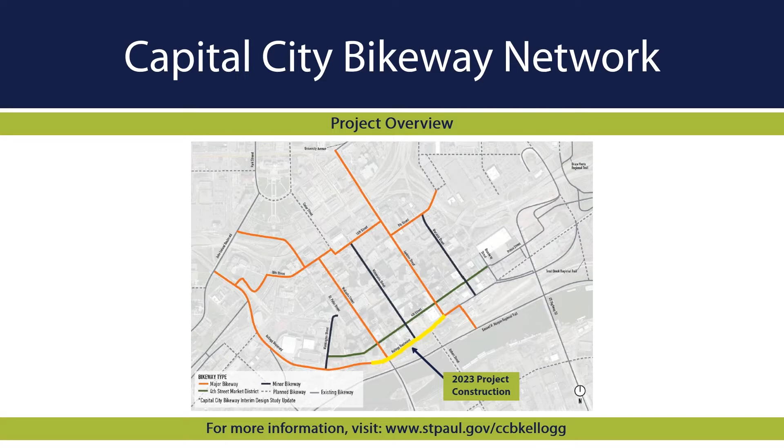Today, Kellogg Boulevard between St. Peter and Jackson does not have dedicated bike facilities, has parking in front of City Hall between St. Peter and Wabasha, has 3 vehicle lanes in each direction, has longer pedestrian crossings at the intersections, and existing vegetation in the center medians limits visibility, and has minimal stormwater treatment along the corridor.

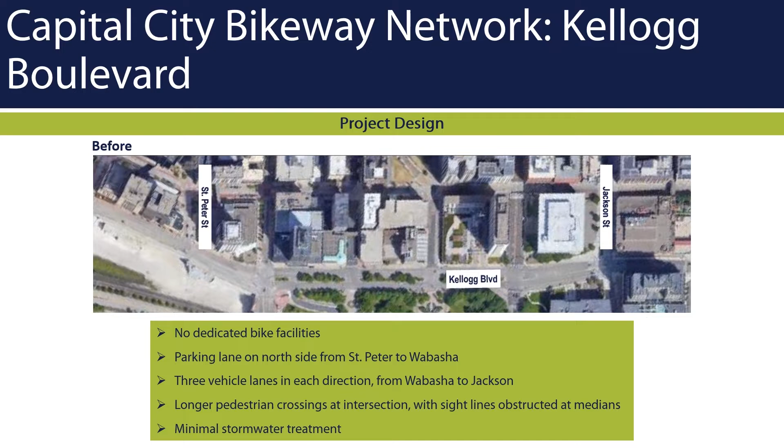Upon completion of this project, there will be a dedicated 2-way bikeway along the north side of the street from St. Peter to Jackson. The parking lane in front of City Hall will be replaced with the new bikeway. There will be 2 vehicle lanes in the east and westbound directions from Wabasha to Jackson.

The center medians will be reconstructed with new tree plantings. The north-south pedestrian crossings will be shortened. The medians will have pedestrian refuge areas along the crosswalks. There will be new dedicated left turn lanes at the Minnesota and Robert Street intersections.

There will be a dedicated bus drop-off zone in front of the Creative Arts School. Vehicle lanes along the block between Robert and Jackson will be more clearly delineated and separated. The stormwater collection system will be retrofitted with underground filter systems.

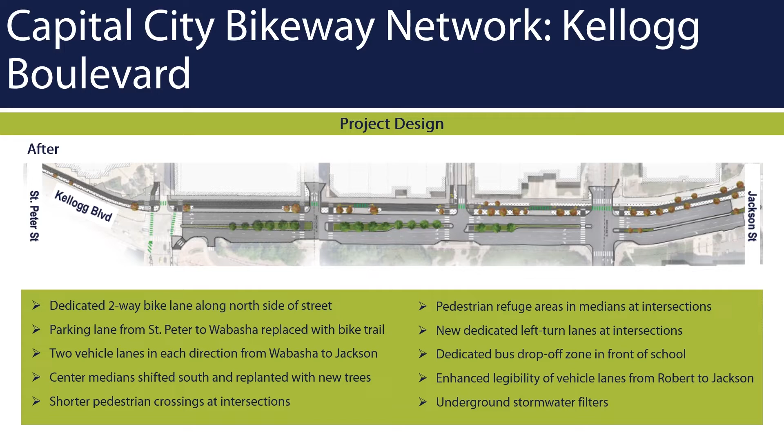A byproduct of these improvements is that the existing landscape medians along Kellogg will need to shift south. This reconfiguration requires removing the existing median trees. However, new trees will be planted within the new medians as part of the project. Additionally, new trees will be planted along the north side of the street where no trees currently exist.

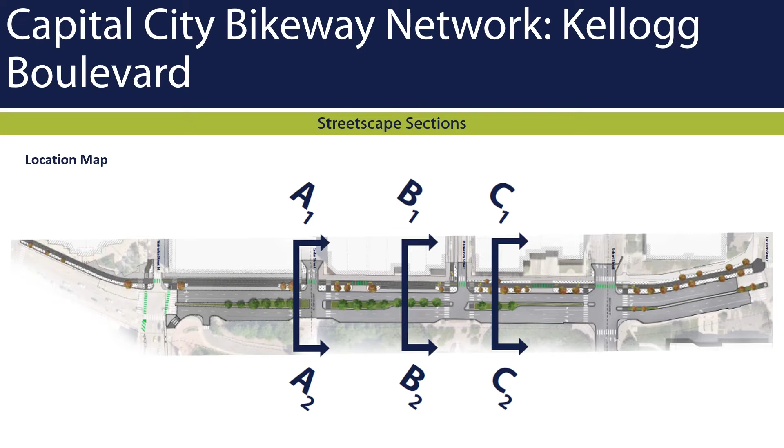To help illustrate how the new roadway will look along Kellogg Boulevard, the following cross sections show perspectives as if you were standing in the street and looking to the east.

Section A is between St. Peter and Wabasha. Here you can see how the new trail will be adjacent to the sidewalk and separated from the road. There will be 2 lanes of vehicle traffic in each direction, separated by the center median, and parking will be maintained along the south side of the street, adjacent to the park. Note that no changes are being made to the sidewalk or anything else along the south side of the street as part of this project.

Section B is looking eastbound in front of the Creative Arts School between Cedar and Minnesota. Here, the trail remains behind the curb, adjacent to the sidewalk. We will also have a dedicated pickup and drop-off lane for the school buses. There will continue to be 2 vehicle lanes in each direction and parking along the south side. At the intersection of Minnesota Street, there will be a dedicated left turn lane for eastbound traffic.

Finally, Section C is looking eastbound between Minnesota Street and Robert Street.

The bikeway, vehicle lanes, and parking lane are all maintained, and you will notice that the outside westbound vehicle lane will also serve as a right turn lane onto Minnesota Street.

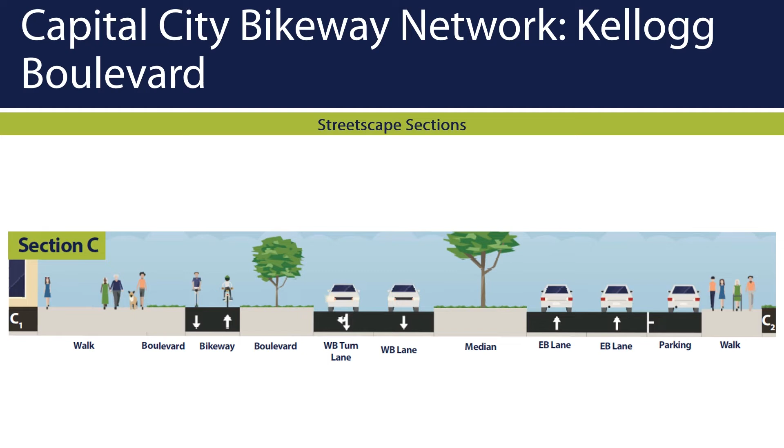These next illustrations give a zoomed-in perspective of the proposed Kellogg Boulevard improvements, looking down from above. Starting at the west end of the project in front of City Hall, the existing parking lane along the north side of the street will be replaced with a wider boulevard area to accommodate the new separated bikeway.

At the Intercontinental Hotel, east of Wabasha, the bikeway will be adjacent to the sidewalk behind the drop-off/valet zone. The center medians along this block from Wabasha to Cedar will be reconstructed with new trees.

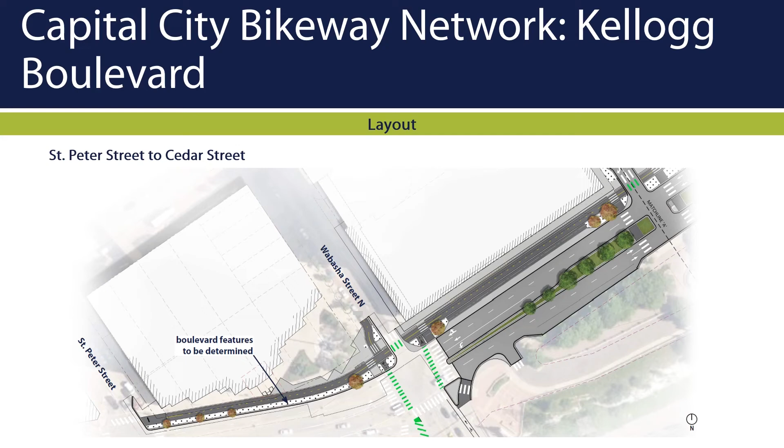From Cedar to Minnesota Street, the bikeway will pass by the existing parking ramp and Creative Arts School, and there will be provisions for a separate bus parking bay for student drop-offs and pickups in front of the school.

The bikeway will continue east to Robert Street alongside the Kellogg Square apartments, where there will also be an opportunity to further separate the bikeway from the sidewalk area.

The center medians between Cedar and Robert will also be reconstructed and replanted with new trees, and you'll also find new dedicated left turn lanes at Minnesota Street and Robert Street to better organize and route traffic along the corridor.

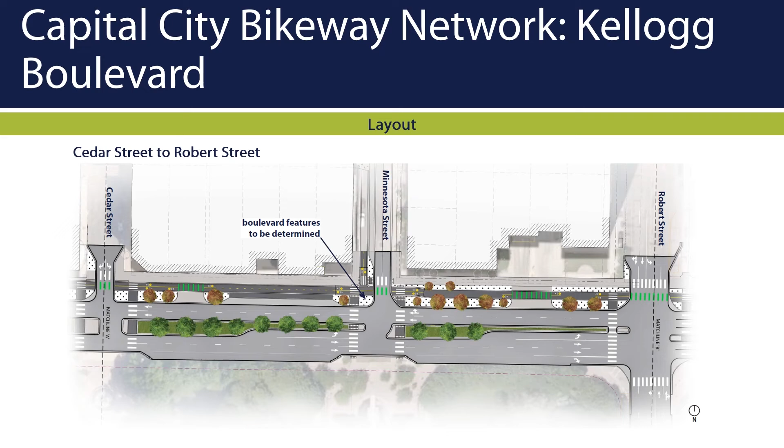Finally, the bikeway will continue east past Robert Street and connect with the existing Capital City Bikeway network at Jackson Street. Today, this block is excessively wide. The improvements from this project will improve both pedestrian and bicyclist experience and the safety and legibility for vehicular traffic.

Along this block, the project will be narrowing the street and providing significant separation between the bikeway and the sidewalk. Additionally, a new center median will be reconstructed between the eastbound and westbound traffic.

These changes will result in a much more comfortable Kellogg to navigate as a pedestrian or bicyclist while still maintaining vehicular traffic over the Robert Street Bridge.

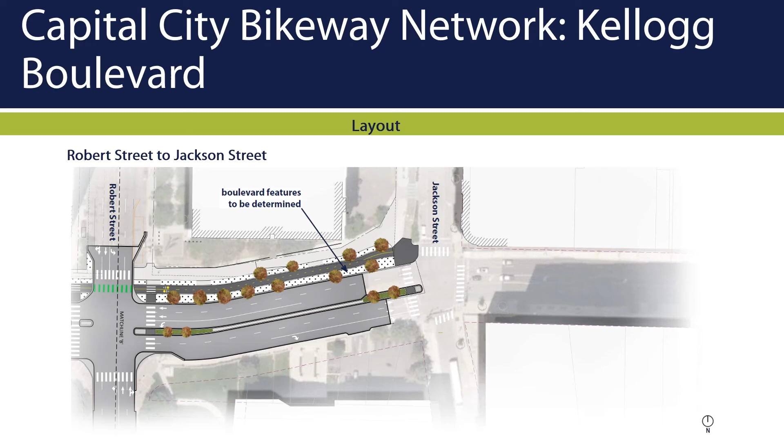As the Capital City Bikeway project team continues to develop its designs for the corridor, additional consideration will be given to how the boulevard spaces between the bikeway and the street and between the bikeway and the sidewalk will be landscaped and furnished. There are a variety of amenities that can be considered.

Some common ones include benches, bike racks, and trash receptacles.